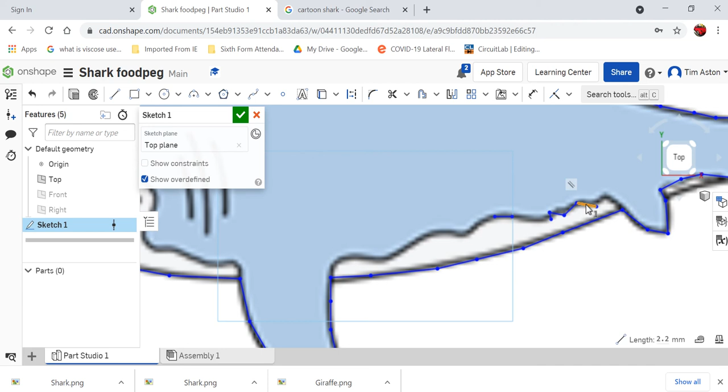I've just drawn that line across there, and I need to get rid of these bits here, just to show you how to get rid of bits you don't want. If you click on the line you don't want, select it and press delete, and you can get rid of lines you don't need. So I'll just tidy that up and get rid of the lines that I don't need.

That one there, and I want to zoom in, and that one there, and that is the outline of my shark. We need to add the food peg part to it now.

Now, I probably should have said this at the beginning, but when we select these, try and go for cartoon images, something that's simple and easily recognizable. This is a 3D printed outcome, so we won't be able to put colour onto it or anything like that. It's just going to be one block colour, so we need to recognise what it is.

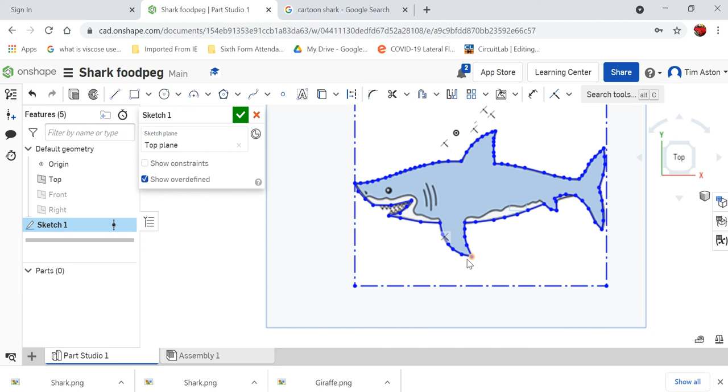So I'll leave the main dorsal fin at the top, but what I need to do now is think about where I'm going to put the food peg and how that's going to come down.

So for that, I think we're going to lose this fin at the bottom. I'm just going to draw a line from there to there, and escape from that line, and then I can select or undo. If you need to hit undo, that's fine. So I'll click that there, click the undo button, and it will move that back.

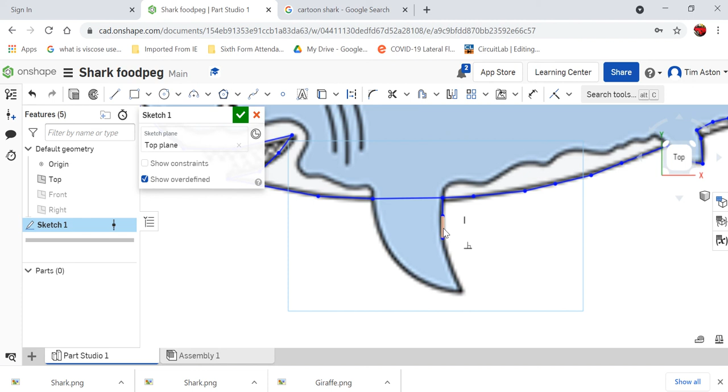Just get rid of the bits I don't want - that there, that there, that there, that there. Now, we're going to learn how to use a mirror tool in a minute.

We're going to use computer-aided design to help us make things easy. So I'm going to draw two lines - a line here, and another line next to it. And draw an extension line there, and escape that line there.

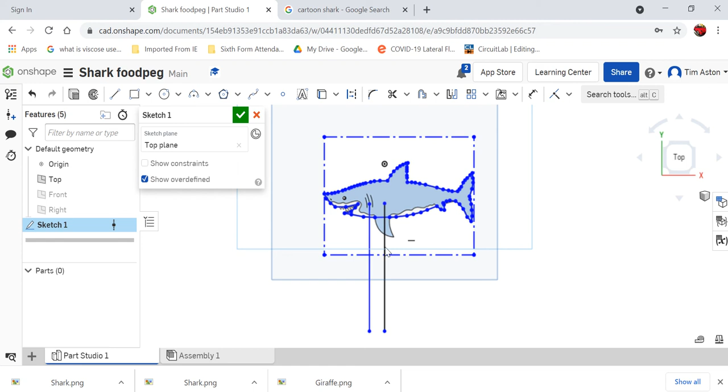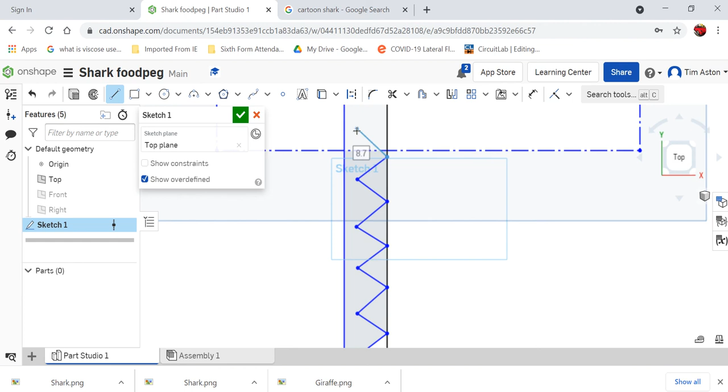Here we want to do the zigzag lines that are going to be the main part of our food peg. So I'm going to draw a line from there to there, and draw in some teeth. As it's quite small, it doesn't have to be mega accurate, but it just needs to represent the teeth that will grip hold of any bags we're closing.

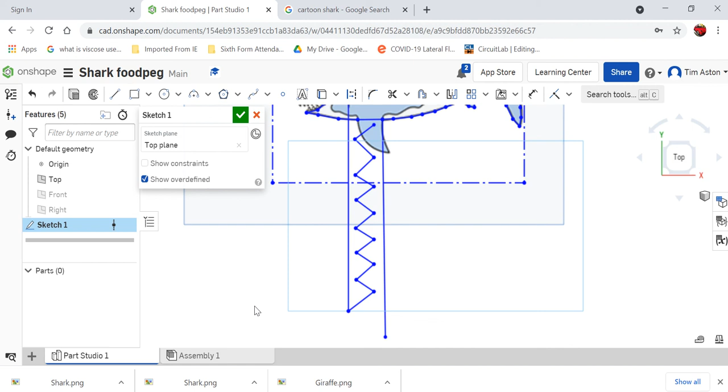And escape that line there. So that's drawn that there. What I want to do is mirror this. Now I'm going to delete that line, and I want to mirror this. So I'm just going to draw a line from there - this is going to be my mirror plane.

So I'm going to hit the mirror button here, and first of all it says select a mirror line, so this is my mirror line. Then it says select entities to be mirrored. So all I do is click that there, and I'm just going to work my way through the lines that I want to mirror.

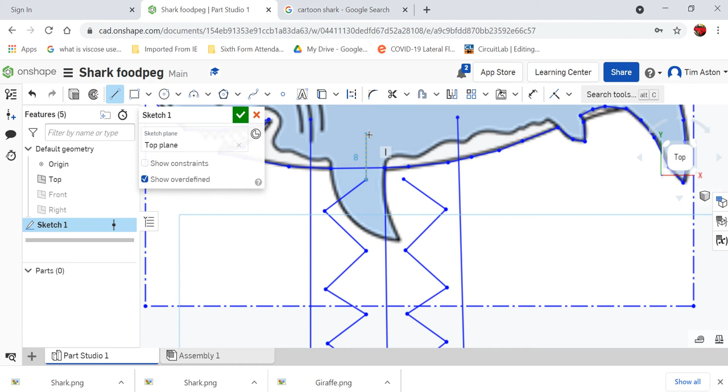And that's done. Escape mirror. And I'm just going to tidy this up now by joining that to there and that to there. Now I just need to tidy the whole drawing up.

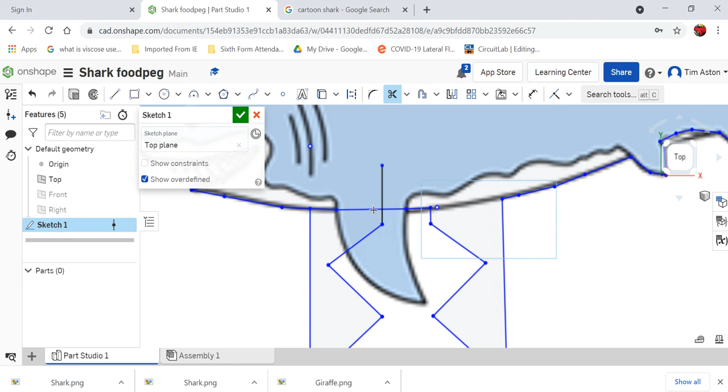So I'm going to get rid of that line, and I want to trim that bit. I've just clicked the trim tool, the scissor tool, and I want to get rid of anything inside this little bit there, there, and there. I want to trim there, there, and there.

Just need to have a little point there, or undo. Delete there. So that should be my shark all drawn. It is at this point now that I can deselect it.

If I click my green tick on the sketch, that now comes out of sketch mode, and we can do three-dimensional things to it. If I want to go back into it and do anything to that sketch, I just have to double click on the sketch there, and I can go back into it and edit it. So I'm going to close that there.

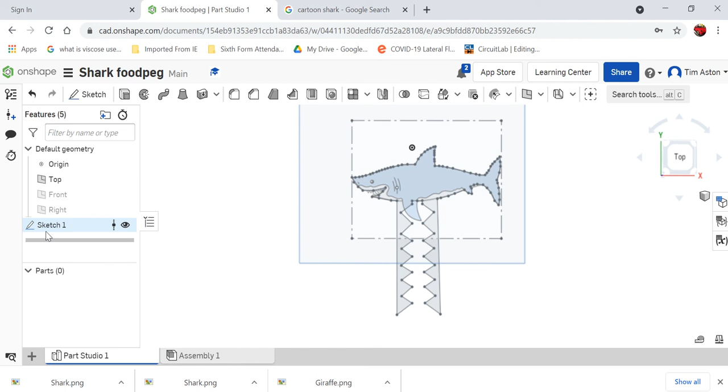So if I do want to do any more to it, and you think, well, I'm trying to draw on it but those tools aren't there, just double click on the sketch and you can do what you want, and then just click the cross to come back out again.

Let's look at this three-dimensionally. So I'm going to click on my cube and just click isometric at the top. I can see that there.

I then need to select the extrude tool. The extrude is going to make this three-dimensional. Click extrude, and I'm going to click on that there. Now that has worked. There's no areas where it isn't joined up.

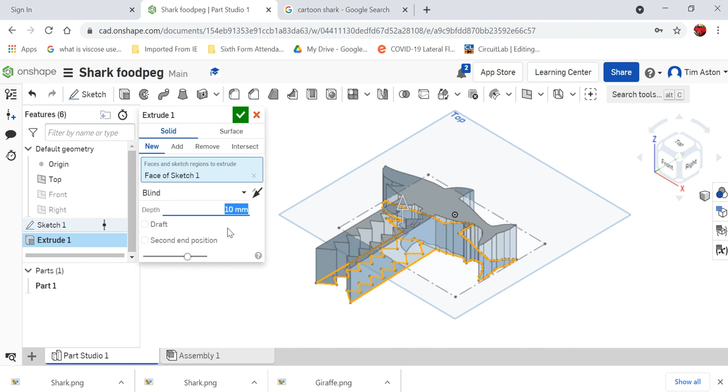You may find that you have to go back into your drawing if it doesn't work, and show where you can join it up. I'm going to select my extrusion at 10mm and see what that looks like. That looks okay to me. I'm going to click the tick to say I'm happy with the extrusion.

And if I want to orbit around and see what's going on, if I hold my right mouse key down, I can then orbit around my drawing.

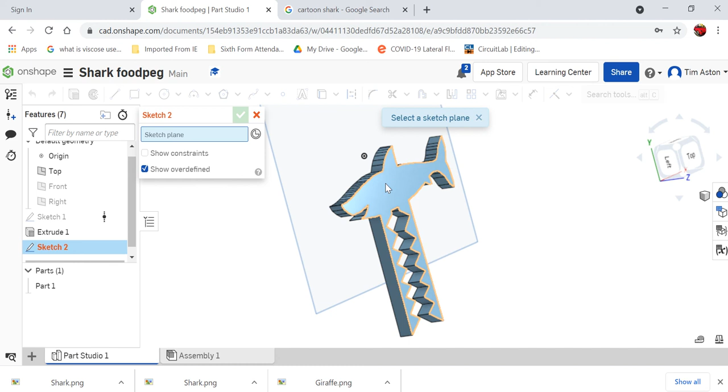It may be that I think, okay, I'd like to make a change to this now. I want to put a little eye on there. So if I click on the sketch tool, I can then draw on this plane there.

And if I just go top, I want to put a little eye on there, for example. I think it would look better with an eye. Just draw a little circle in there and click OK.

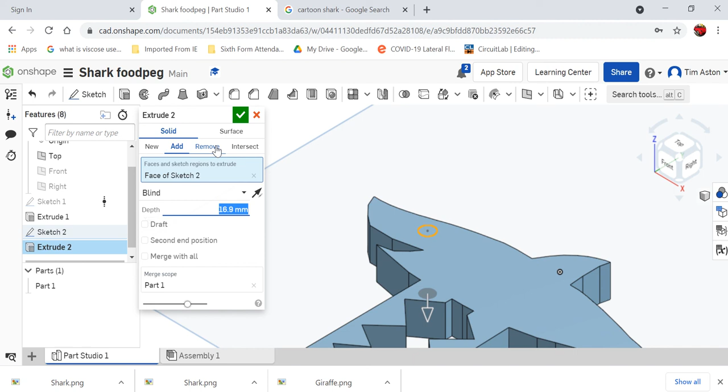I'm going to just look at it in isometric again, and I'm going to click extrude, and I want to extrude this eye. I want to change my extrusion so that instead of adding material, I want to remove material. So instead of it saying add, I'm going to select remove, and I know that that's 10 mil, so I'm going to change that to 10, click OK, and that is the eye for the shark.

Now you need to send this to me. You can't send me a web link or anything like that. What you do need to do is turn this into an STL file, which means stereolithography. We can learn about this at another stage, but for argument's sake, let's just do that.

So we go to the part here, right click, and export. And it's going to bring up a new box here. File name, you can call it Shark if you want.

And the units need to be millimeters. And on resolution, I would really recommend having it set to fine. Do not forget to set it to fine. Download and store, so download it and click OK.

And that will download that, and it should save it into your downloads or in whatever destination you want to download it to.